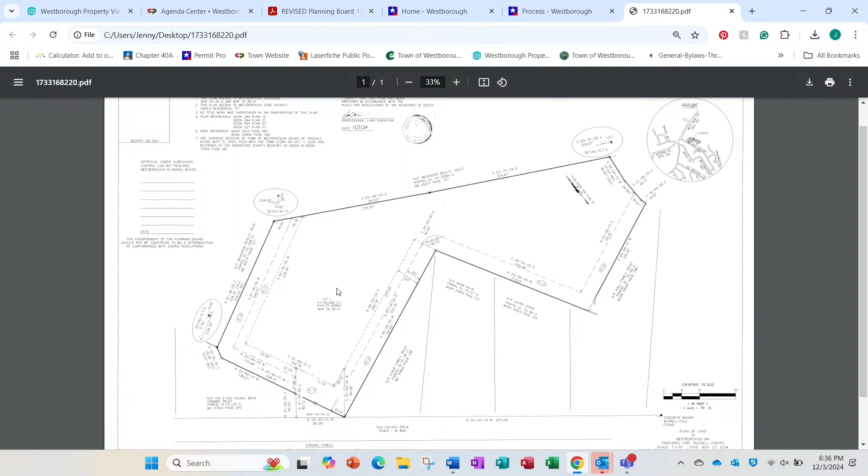The 3.3 acre parcel in the rear is entirely ringed by farmer stone walls. So the dark boundary is a stone wall? Yeah, a series of ellipses that make up a stone wall - that's where my confusion came in. So a portion of that stone wall would be removed at some point if the parcel's built on? Right, they'll have to get a driveway in from Old Colony, so a small portion will have to be relocated.

Okay, all right, I think that was my only question. Thanks. John: no questions. I had no questions also. Could I have a motion to approve the A&R as shown on this plan? So moved. Second. All in favor? Great, thank you. Well, thanks for your time. All right, thank you.

The second matter on the agenda was an application from Steve Nicasa for lot releases for Ridings 2, a subdivision, looking for additional lot releases. We visited this site last week to take a look, particularly at problems that had occurred there, which had to do with storm water drainage and also erosion problems on a back hill. I don't believe anyone's here representing the Ridings tonight, but there have been numerous discussions between the town planner, the engineer, and the conservation department concerning this piece of property, and we have a recommended motion on this.

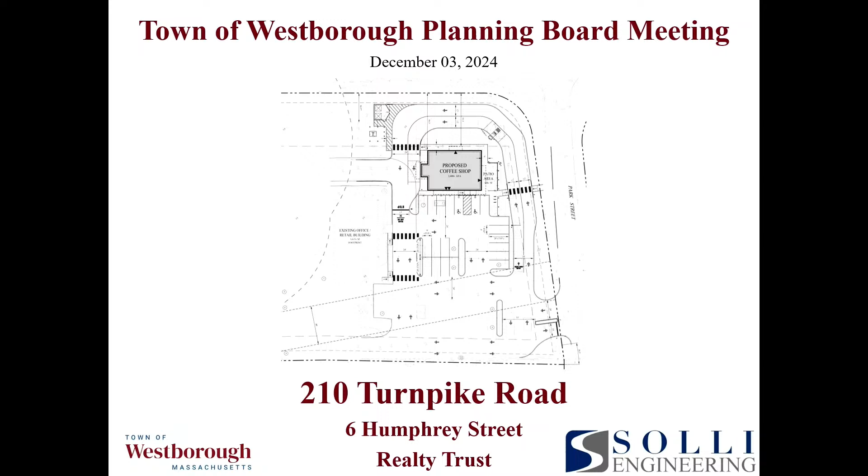So I can go through, there was a couple things that were left out of the presentation a few weeks ago, and I think they kind of got overlooked. I did want to reiterate that in existing conditions, the site has 3 driveways off Park Street, and the furthest north driveway is roughly 94 feet from the curb line of Route 9.

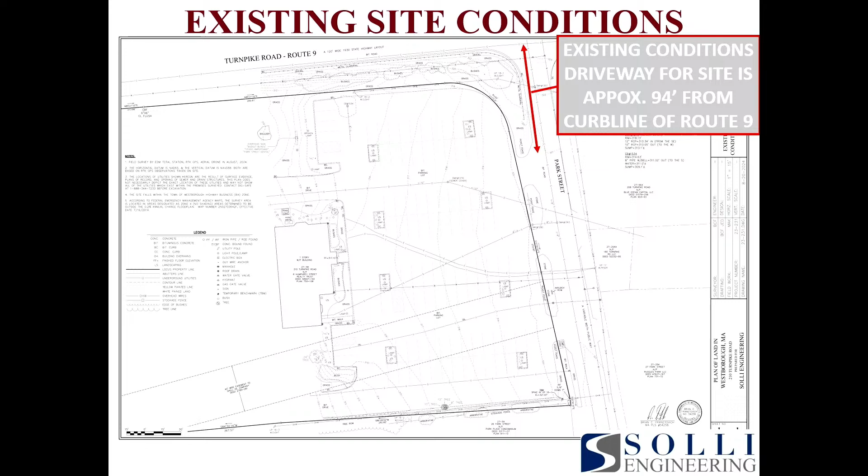The reason I bring this up is, you'll see in the modified plan, which I can show now, we are relocating the driveway even further south down Park Street. The zoning regulations require the driveway to be a minimum of 20 feet from adjoining property lines, so that's the reasoning. We're about 20.5 feet to the north of the southerly property line, on the curb return. So we can't really push it any further south.

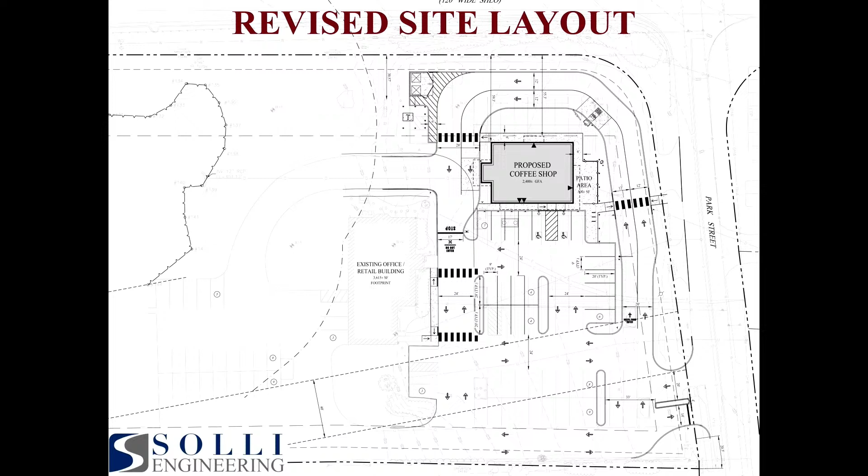But that was something we did look into - reducing from 3 existing driveways to 1, and increasing the distance from 94 feet to 235 feet, is a significant improvement that I think got overlooked a little bit. I'm not sure if I even brought it up at the initial hearing, so I did want to bring that up.

The revised site plan also - so a couple things. We did hear various board members bring up concerns regarding the sidewalk and additional signage and pavement markings throughout the site. So this plan, the goal was to alleviate those concerns. We are proposing a sidewalk along the existing building, crosswalks to the parking, pavement arrows throughout, and the modified driveway.

It was discussed that we were looking for a wider driveway with some sort of middle bisected island. We didn't accommodate with a curbed island - that is a striped island, so it's a yellow striping. That's to accommodate the turning radius of larger delivery vehicles, trash trucks, and fire trucks as well.

But that's the gist of the revised site plan. We do anticipate submitting full civil plans at the end of this week that address this revised plan, as well as address the comments we've received from the stormwater peer review and site peer review - they had quite a bit of comments on the notes and details of the drawings. So we're working through those to get revised plans.

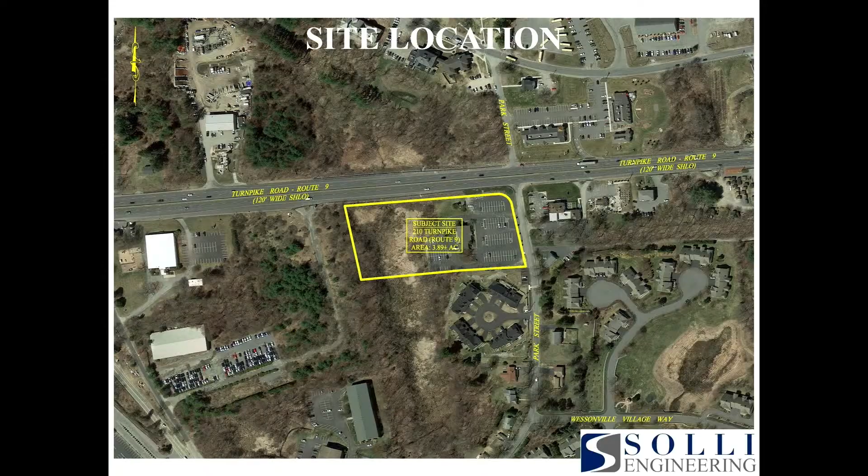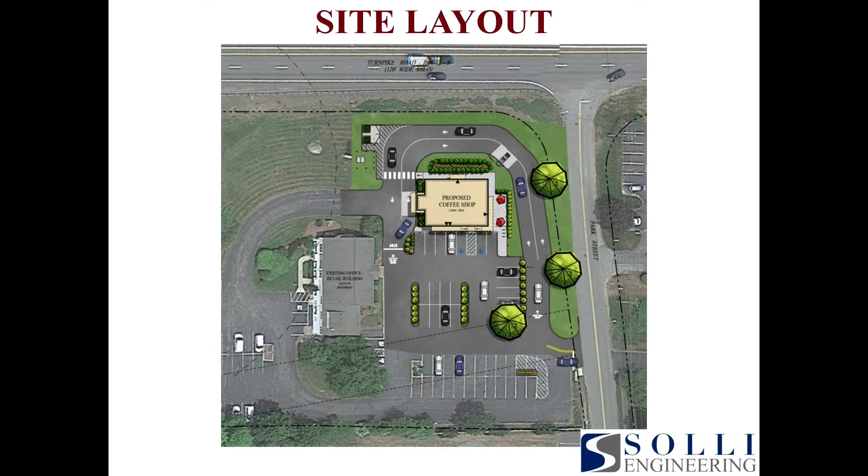I have the rendering. So when we came before you 3 or 4 weeks ago, the driveway was proposed - I don't have a distance, but I could get that - some distance north of where it's currently proposed. You can see it's basically in line with the parking spaces, the spine to the south. Now it's going to be proposed a little bit further south. Previously it was kind of in line here; now it's about, I would estimate, 25 feet further south.

I know the sketch you had provided mentioned potentially breaking the driveways up. The zoning bylaws actually don't allow a driveway any closer to that property line - I think it's 20 feet if I'm not mistaken. So we're at 20.5 on the curb return here, so that's about as far south as we could put the driveway. It does still align the entrance lane with the residential driveway across Park Street, so we were considering that as well. Having driveways aligned is always something from a design standpoint you're trying to achieve.

Does that answer your question?

So you have one driveway there, a 20-foot wide access lane, much further south, allowing people going to the office building to essentially not have to cut across the line of traffic that's in a waiting period.

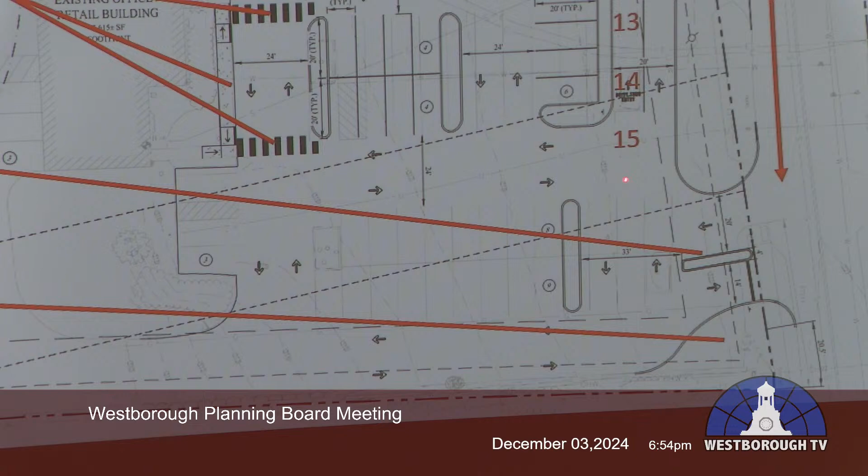If we were to maintain this as a two-way drive aisle, any vehicles that came down this would actually have to circulate the site. If there was no way to exit here, you'd have to circulate the site utilizing the bypass, which also helps maintain the traffic flows for the other business. We did look at that.

We could certainly look at potentially modifying this a little bit to help alleviate those concerns, but there's sufficient space, and it's actually wider than a typical drive aisle for any commercial site in town—it's greater than 24 feet.

Couldn't you have people come out on the left-hand side of that island there, so they don't cross the traffic coming in? In other words, would you put that island—you have this island here—and have them exit so they have to turn right and pick up the driveway there?

Couldn't you put the island in the middle of that drive aisle? Or couldn't you have that central aisle be one-way to the west?

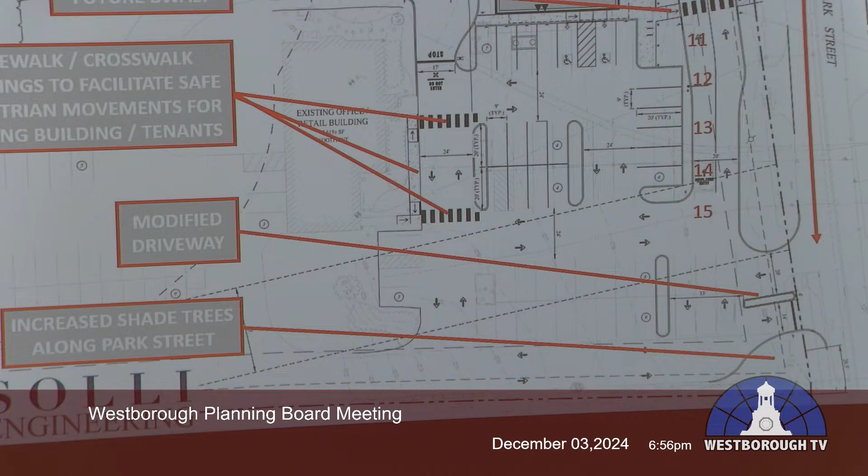And make everybody turn right to come out the southerly aisle? I understand that... we certainly could. I will say this, the layout of this is fairly consistent with typical commercial developments, and it's in conformance with the site plan review standards as well, from a width, circulation, drive aisle standpoint.

I think it was brought up that the site is overparked, and I believe one of the comment letters from residents mentioned this, and it was brought up by the chairperson as well. A large portion of the parking spaces are behind the building, so eliminating parking out in front of the building is not really something the applicant wants to explore, because the angled spaces reduce it. I think it dropped this island to 11 or 12 total spaces when you do 60-degree spaces, which is what you need. You don't want anyone backing out 90 degrees and then being confused on a one-way.

I would be hesitant to block off any access points and force driving in a certain direction, because I don't think it's going to be a super busy site. I think it's going to be busy during certain periods of time, and even then probably not super busy after the first few months. But if we start blocking off parking areas, it's going to be a nightmare for people trying to turn around or back out of spaces or go through those. Having more access points to circulate around the parking lot will help alleviate those issues.

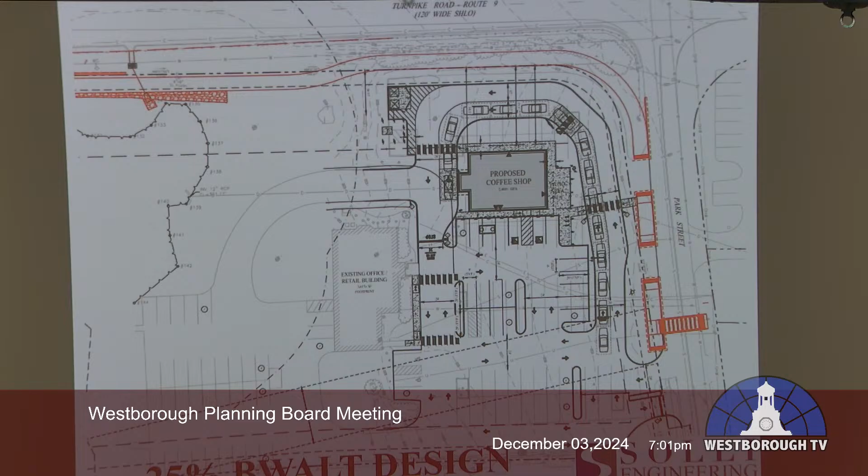But it obviously does require some easements on the property of 210 Turnpike, as well as connectivity proposed across the drive-through lane here. We have crosswalk signs as well as a crosswalk, and it will allow pedestrians to access the bike racks that are located here very easily. And the owner, applicant, as well as the town, I think they see this as potentially being highly utilized by pedestrians that use the B-Walt eventually, stopping, getting a coffee, and then sitting on the patio and potentially continuing on, or getting a coffee and just taking a short walk could be something that's attractive. So we did want to include that connectivity.

The easement that's going to be required - looking at this further, I think we did omit an area as well. It's basically the entire frontage of the property to the west of the coffee shop. There's a large wetland area, and the B-Walt is proposed hugging the property line just south of Route 9. So I have it delineated as about a 10,600 square foot area that will require an easement from the property owner. There will also be an easement in the crossing area, which isn't shown here.

I know there were comments from the Trails Committee - they mentioned the crossing potentially being reconfigured to avoid a 90-degree angle. I'm not sure if that's going to be included in the 75% design, but there will be some sort of easement in this area as well.

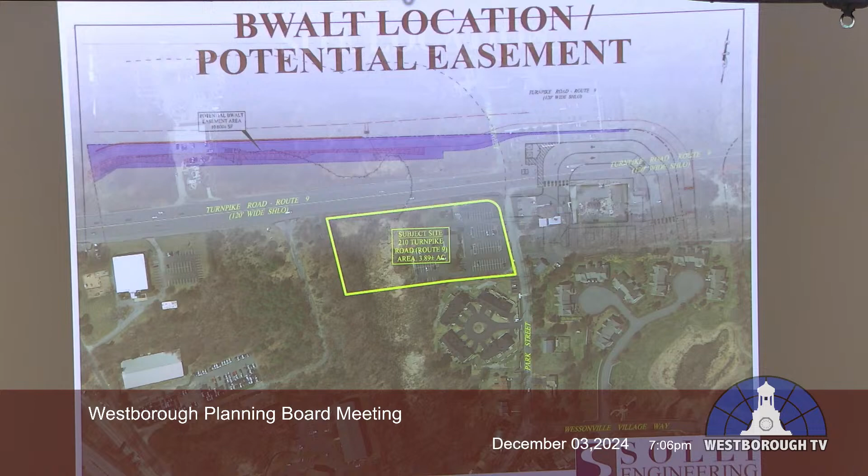The other question is - I know you're in preliminary discussions with the state, and you said maybe you can't really get anything changed until you have approval for a deceleration or acceleration lane. But if in fact that deceleration lane was created, you're suggesting that the B-Walt easement is that purple shaded area? Correct. Would that deceleration lane require us to have an easement on the actual corner? In other words, you're suggesting the B-Walt's going to end up in the right-of-way of Route 9, Turnpike Road? Yeah, in this location, just west of the dumpster.

Okay, but if a deceleration lane is put in, will we have enough room to put the B-Walt and a deceleration lane? I haven't run through that design.

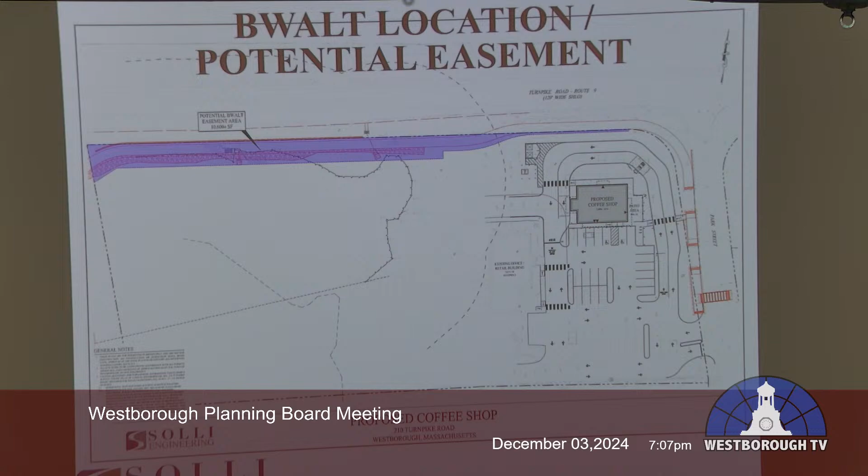I'm just wondering if that easement needs to be, again, it looks to me like you have space between the bypass lane and, I think the way they offset the B-Walt, I think it's 12 feet off the bypass, I could be mistaken. So between the curb line of the bypass and the edge, I'm just asking if we need that 12 feet to put the B-Walt in, is it going to be there? I don't think right up against the curb line is a wise idea, and the alternative layout, I think the acceleration lane and deceleration lane is a state problem. There's not much the town can do to force that.

You're just making sure there's enough room if it were to happen. But if they do put that in, and I hope they do someday soon, are we going to have room to run that B-Walt, or are we going to need to go back to this owner and ask him for some more space? Could there be language included in the easement itself that addresses that? I don't know what the solution is. I just want to know that, because right now all there is a breakdown lane, correct, and I don't know exactly how far that right-of-way extends into this site, whether a deceleration lane would need to be X amount of feet. Let's say 12 feet, and then you have another 12 feet before you get to the bypass lane. I don't want to build the B-Walt and then have the state come in and put a deceleration lane and have this like competition between the B-Walt and a deceleration lane.

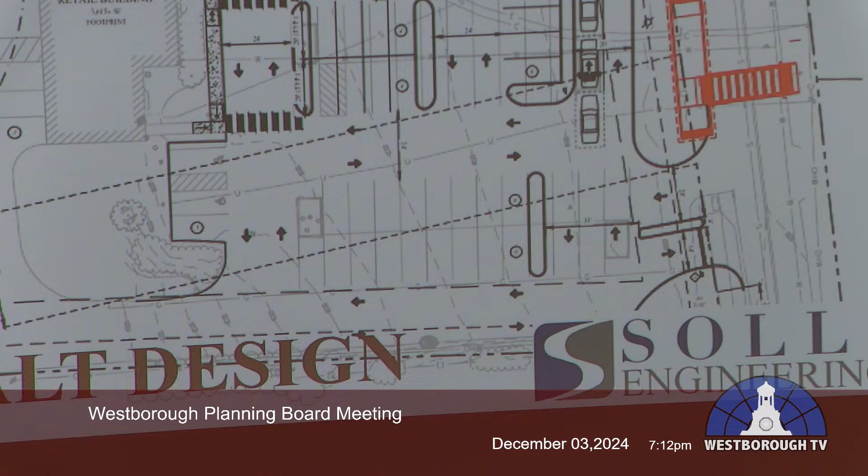Looks like you'd just pave it - it's actually on gravel on both sides. I'm on Google Maps, and I'm trying to figure out which of those sidewalks goes down Park Street, because I drove. Both do, but not the whole length of Park Street.

I'm just trying to figure out where the crossing is. So it looks like, about halfway down Park Street, it goes down the east side. There are stops on the west side until the next intersection. So people coming up Park Street are going to be on the east side, and at some point they would have to cross Park Street to get to the Starbucks.

Correct. And there's a crosswalk right before the residential development to the south - yeah, there's one there. Okay, good. I think it's about 200 feet to the south of the property.

Yeah, it might be on this aerial, actually. I know there's another crossing quite a bit further down that doesn't have a crosswalk - right, it's between the parking and the residential development. I guess it's closer than 200 feet.

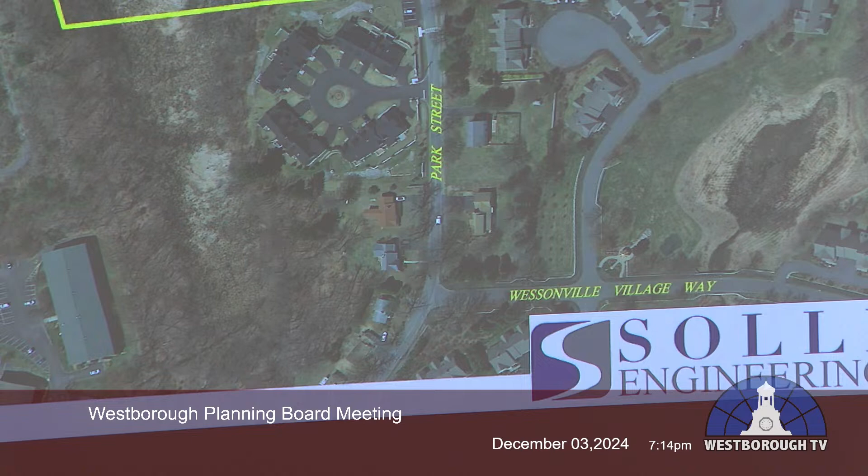So I think, continuing to your point, up the westerly side, across the driveway to the connection point is okay.

Do you have anything else, Mr. Manafort? No, that was it for tonight. If there's any other questions, I'd be happy to answer them, but I assume the next meeting will have a lot more answers and resolution to the traffic and the stormwater and such.

I'd like to open the public hearing to any questions from the audience. We heard a number of suggestions last week at our last hearing, and I think we've tried to address some of those. If there is new or further information you'd like to bring to the applicant and the planning board, we'd be glad to listen to it. I ask that you keep your presentation under 2 minutes, and when you introduce yourself, please spell your last name for us. Is there anyone who wishes to comment tonight?

Yes, sir. Under 2 minutes. Okay. Wayne Webster, 3 Essex Way.

Appreciate the move to make this a more usable spot. What we have here - and I'm not a developer - is a very high volume business. We wouldn't be operating from 5 a.m. to 10 p.m. if we didn't have all this queuing and this problem with traffic on this lot. So we have a proposed very high volume business on a lot that just doesn't fit a very high volume business, and I think that's why we're struggling so much with it. I keep looking at it and saying, where do you put the building? We have an existing building to the west that kind of bogs down this lot. Park Street is very narrow, very difficult. So we continue to be concerned about the traffic on Park Street, about that bogging down especially during peak hours, but really concerned about the hours of operation and how this lot will be full all the time and very busy - it really isn't built for that. It's just too small. I think Starbucks is great, it's just the wrong business on the wrong spot. That's about all we have to say about it.

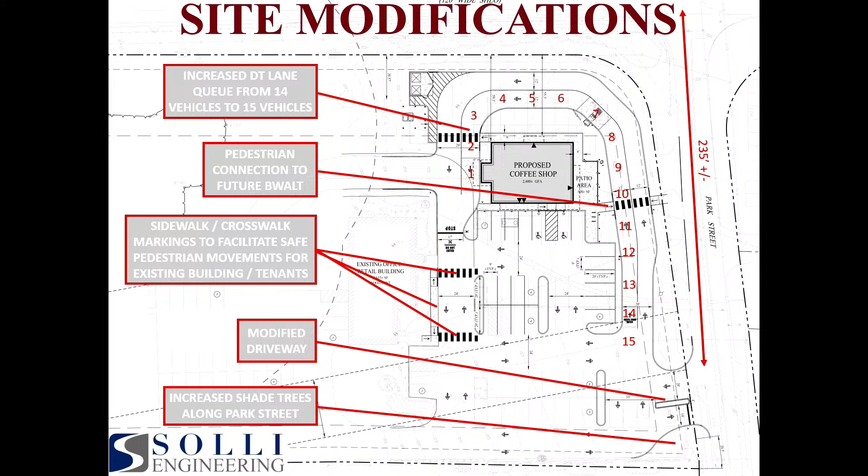Thank you. If I could just add, the speed limit on Route 9 is 55, and the Park Street speed limit is 25. I also wanted to mention that the reconfigured driveway actually increases the drive-through queue. So obviously the on-site queue exceeds 15 if there was a looped configuration. In the drive-through lane, there is a queue of 15, which exceeds the town's site plan review regulations for the number of vehicles before the order point and between the order point and the pickup window. I believe the required is 12 total, so we have 15. Actually, the replacement of the driveways increases the amount of space for the drive-through lane.

In the actual lane by right, one vehicle, yeah. Okay. Yep. Yes, sir.

My name is Phil McDowell. I live at 9 Quaker Way. I have two issues.

I assumed that the numbered cars we see on that screen represent one lane of a two-lane counterclockwise flow of cars. Is that correct? Yep, there's a drive-through lane and a dedicated bypass.

Well, the point I want to make is that eastbound traffic on Route 9 will be seeing headlights to their right because of those two lanes. I don't know if you've ever driven on a road like Route 9 and seen headlights coming at you — it's quite dangerous. I don't want to give you the answer, which is to do the whole thing clockwise rather than counterclockwise, but that's the planning board's call. There's something really dangerous when you have headlights coming right at you, and they're on your right when they should be on your left.

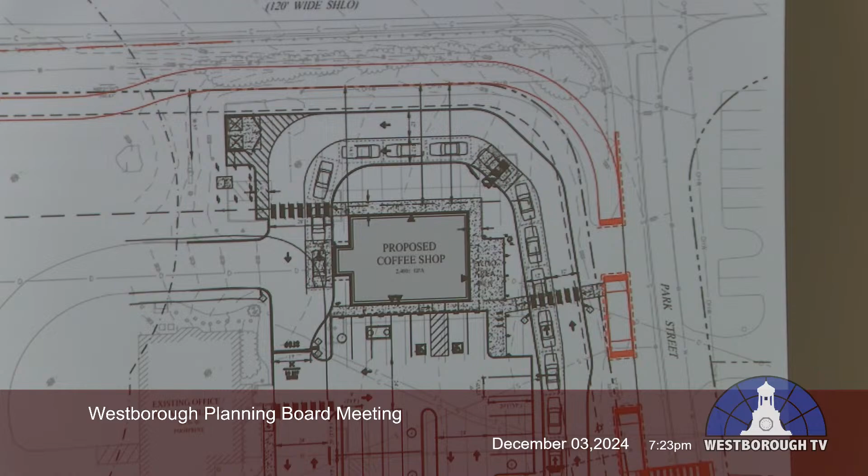There's a grade change that's more significant as you go west. The coffee shop is going to be somewhat depressed relative to Route 9. The B-Walt will eventually be between the coffee shop and this red dash line, and I think they're proposing to mount it on the existing guide rail as a snow fence, some sort of mesh to prevent snow or debris from plows impacting the B-Walt. I think that will further shield the visibility or impact of light. There's a grade change of between 2 feet, and as you get further west, I think it's 6 to 8 feet. Anyone on the site walk might remember that Route 9 does slope down.

Is there anyone else in the audience that'd like to make a comment? Yes, ma'am.

I'm Paula, last name is Young, Y-O-U-N-G, 11 Stagecoach Circle.

So we only have one exit also onto Park Street, entrance and exit. But my question, I guess, is you said... could you hold the microphone a little closer? Okay, sorry, thank you.

What is the criteria that you'll be using in making the decision? And you mentioned that it was a special permit, so I didn't know what that all meant.

So it's a site plan review. The restaurant itself is a use that's allowed by right without a special permit. However, because it has a drive-through component, that requires a special permit from the planning board.

So special permits are discretionary permits where the planning board can decide that if they don't meet specific findings based on the requirements in the bylaw, they don't have to approve it. But a site plan review, they just have to meet the site plan review standards and regulations.